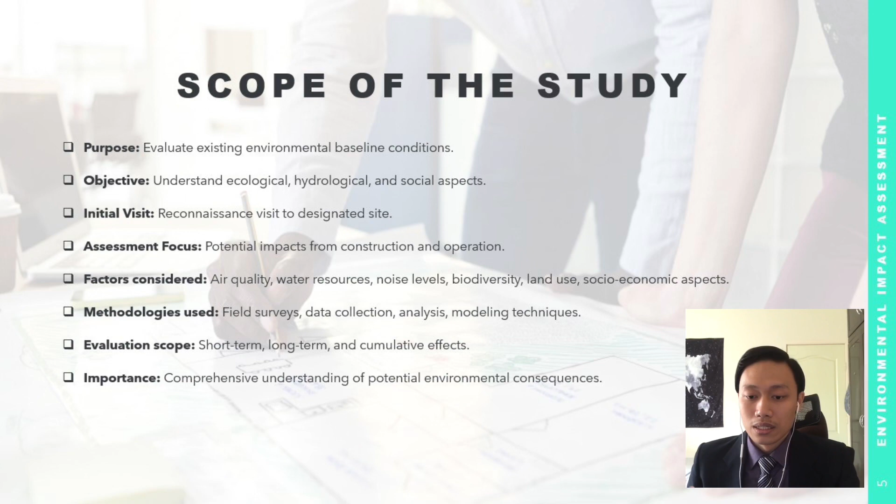The last one is evaluation scope and importance. EIA evaluates short-term, long-term, and cumulative effects of proposed projects on the environment. It provides a comprehensive understanding of potential environmental consequences, aiding in informed decision making and sustainable development practice.

So our objective has 5 points. The first one is description of the proposed project and activities involved. We need to provide a clear understanding of the project scope and execution.

Second is identification of influence, community and surroundings. We need to determine areas likely to be impacted by the proposed developments.

The third objective is assessment of environmental and social consequences. We need to anticipate, assess and evaluate impacts during construction and operation. Also, we need to consider the sensitive areas and potential risks.

The fourth one is the mitigation measures for adverse impacts. We need to identify measures to minimize pollution, disruption, and disturbance. Also address potential environmental and social concerns.

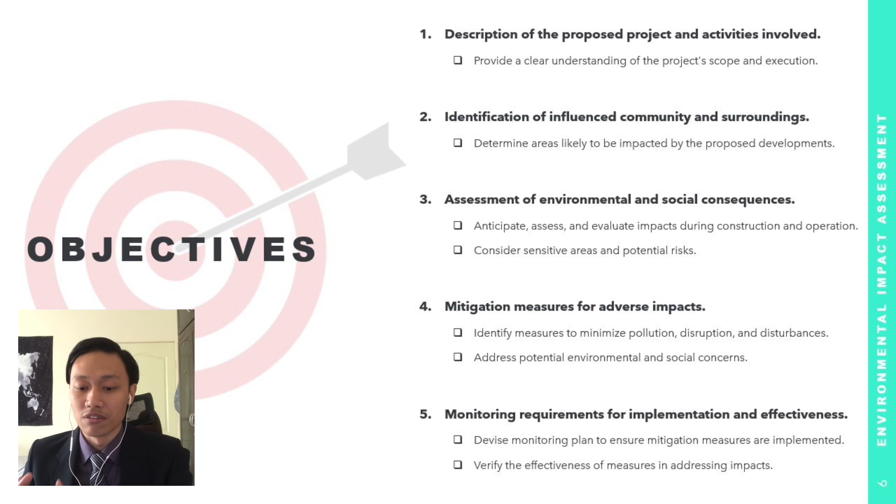The last one is monitoring requirements for implementation and effectiveness. We need to devise a monitoring plan to ensure mitigation measures are implemented. Also verify the effectiveness of measures in addressing impacts.

The next slide is project details. The project title is the construction and completion of Sekolah Kebangsaan Muzaffar Shah, which will include 24 classrooms and related facilities. This project will be located in Melaka Tengah, Melaka, especially at Lot PT 18341 in Bukit Katil District. The proposed site is a 10.9 acre area characterized by uneven and hilly terrain, currently covered with rubber trees and forest vegetation.

The site location and proximity: the proposed site for the school is situated near Water City Hotel on the western side of the hotel. This location provides convenient access for students and staff.

The next one is earthwork and platform level. Significant earthwork will be required to prepare the site for construction. The uneven and hilly terrain necessitates leveling to create a suitable platform for the school building. Next is infrastructure development.

Infrastructure development is a crucial aspect of the project. It includes the construction of internal roads, provision of power supply, water supply, sewer, and stormwater pipe network, and also a waste management system. The next one is the construction phase, where the project will be divided into 3 construction phases based on house design and type. This phased approach allows for efficient planning and execution while ensuring timely completion.

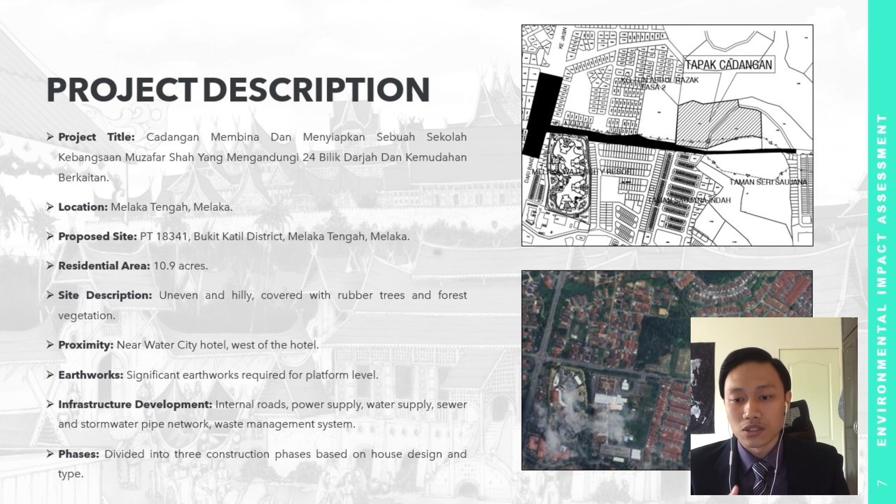So the conclusion is the construction of Sekolah Kebangsaan Muzaffar Shah in Melaka Tengah, Melaka is a significant project aimed at providing quality education facilities. The proposed site, which is uneven and hilly terrain, will require significant earthworks to create a suitable platform for the school. The infrastructure development, including internal roads, power supply, water supply, sewer and stormwater pipe network, and also waste management systems will be implemented. The project will be executed in 3 construction phases based on house design and type. This is the project layout for Sekolah Kebangsaan Muzaffar Shah at Melaka.

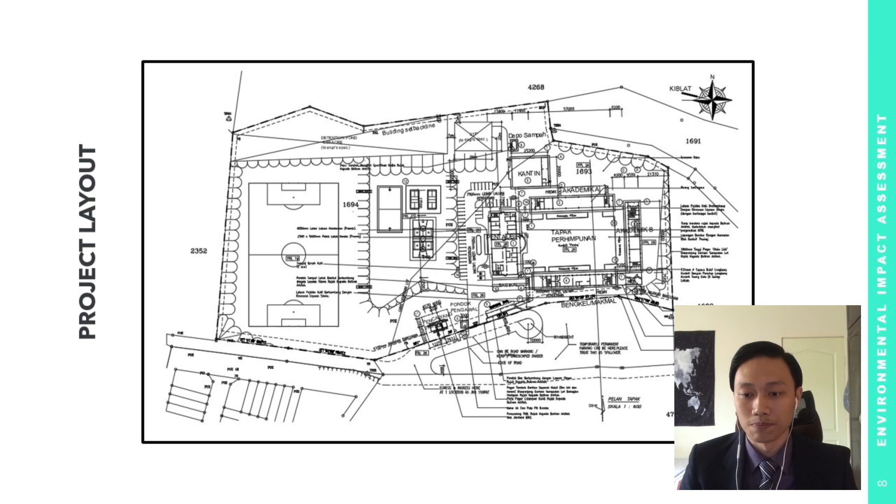Topography for this project, which is at Melaka Tengah, generally has a geography of flat terrain with some slight undulation in specific spots. The district is mostly located on the coastal plain of the Malacca Strait, which is distinguished by low-lying topography around sea level. The topography progressively rises as you approach further inland, resulting in somewhat higher altitudes and moderate slopes.

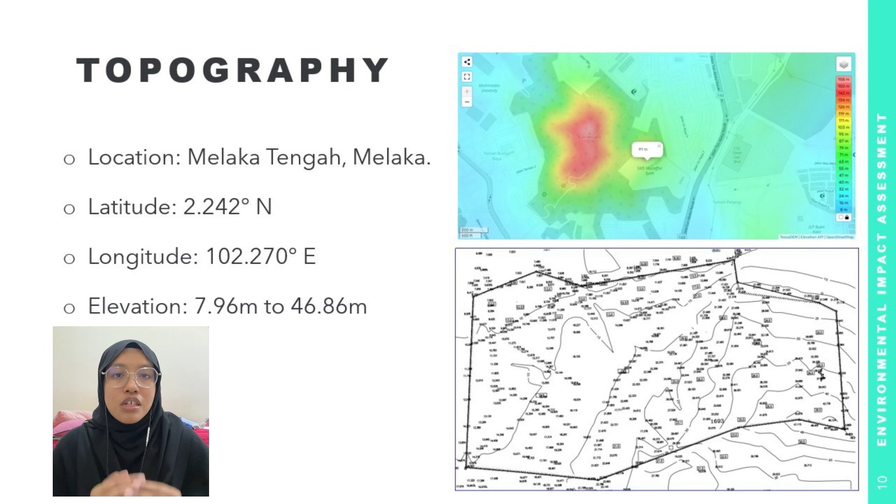Soil investigation was carried out to determine the subsurface condition and to get soil parameters for geotechnical design. Laboratory studies on soil samples acquired during field soil research activities were used to assess soil parameters. Based on the findings of the site investigations conducted by Ikram Engineering Services Sdn Berhad, 5 exploratory boreholes have been drilled within the project site.

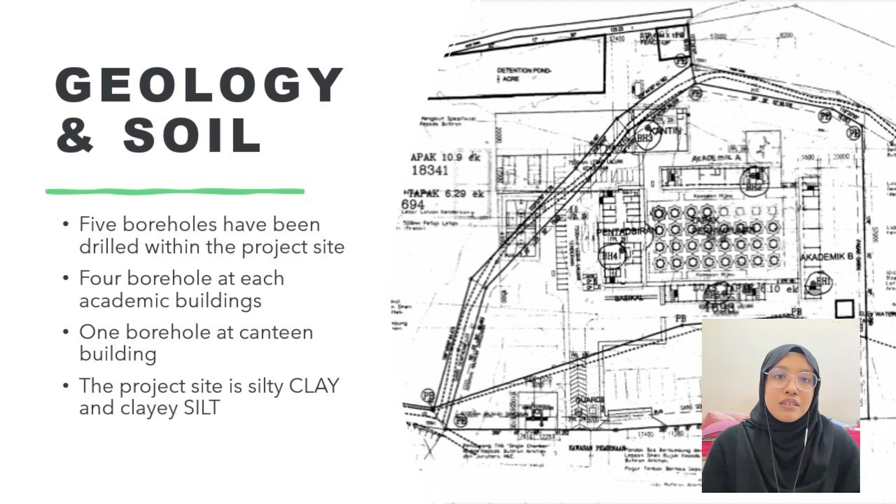Based on the figures shown, the Melaka River runs through the area, splitting Bandaraya Melaka into 2 halves. This river distinguishes the topography by generating a natural stream and altering the urban environment. In addition to the Melaka River, the state is traversed by other smaller rivers, streams, and creeks, including Sungai Kesang, Sungai Keruh, and Sungai Duyung. These bodies of water contribute to the region's surface hydrology by acting as drainage routes and sustaining ecosystems.

There are multiple mukims that include different areas of the Melaka River Basin. Bandar Hilir, Tanjung Kling, Batu Berendam, Bukit Baru, and Bertam are among the mukims along the Melaka River Basin. Each mukim may have unique features such as land usage, economic activity, and population density.

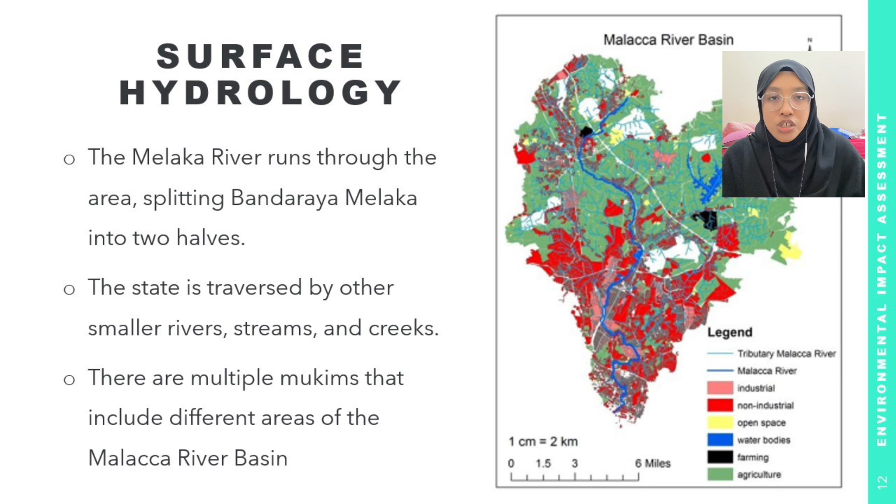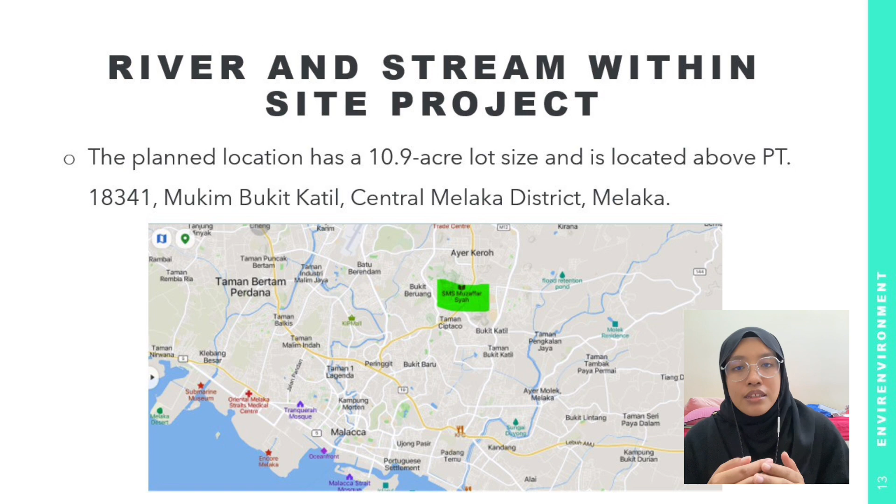The planned location has a 10.9 acre lot size and is located above PT 18341, Mukim Bukit Katil, Central Melaka District, Melaka. Rubber plants and other forest species are overgrown on this uneven mountainous construction site. To achieve the necessary platform level, significant ground cutting must be done. A road that connects Tehel with the Bukit Katil neighborhood is being built just in front of the building site.

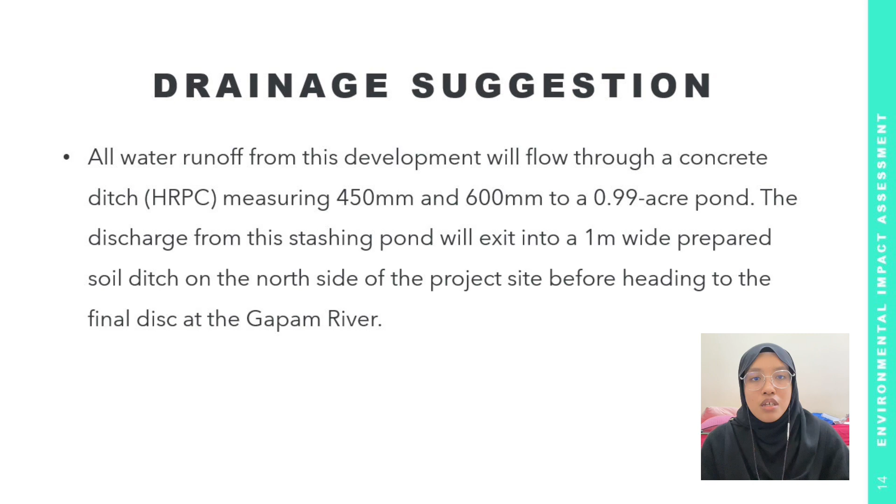For drainage suggestion, all water runoff from this development will flow through a concrete ditch, HRPC, measuring 450 mm and 600 mm, to a 0.99 acre pond. The discharge from the stashing pond will exit into a 1 meter wide prepared soil ditch on the north side of the project site before heading to the final ditch at the Gapam River.

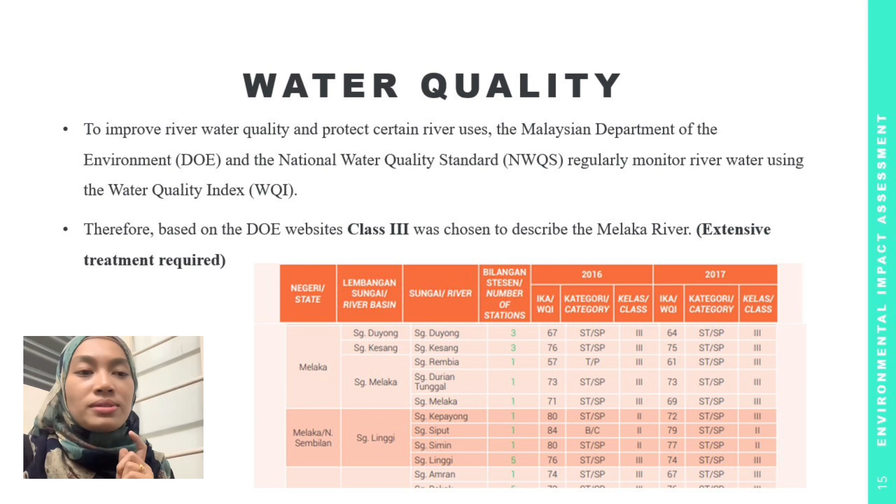Alright, so for the water quality, it is important to improve river water quality and protect certain river uses. The Malaysian Department of the Environment (DOE) and the National Water Quality Standard (NWQS) regularly monitor river water using the Water Quality Index, which is WQI. Therefore, based on the DOE website, Class 3 was chosen to describe the Melaka River and the extensive treatment required for this river. As you can see here, there is a table that allocates the Sungai Melaka as stated in Class 3.

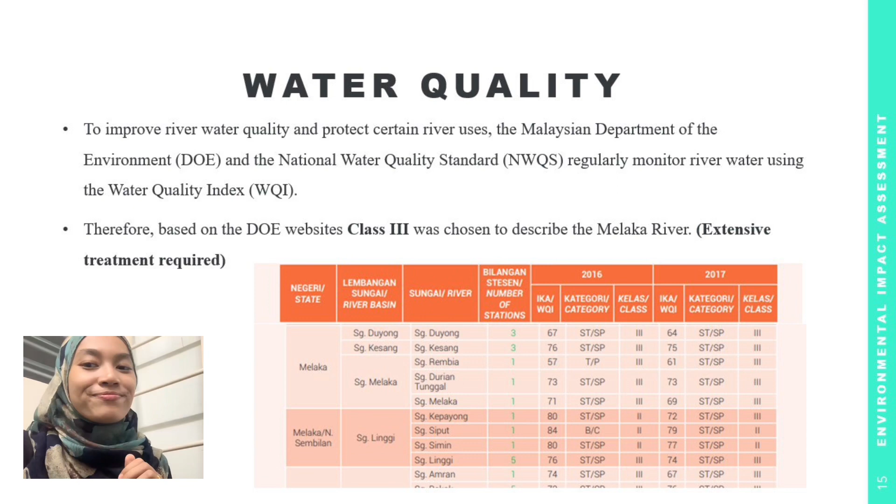Okay, so we will continue to the climate and meteorology. In this part, we are going to describe the weather for a specific area and time, including temperature, precipitation, relative humidity, wind speed, and direction, as provided by Jabatan Meteorologi Malaysia.

So, for the temperature at Melaka City, May was the warmest month ever recorded, which correlated with the dry season at the time. May's average temperature is 27.3 degrees Celsius.

The coldest month of the year is January, with an average temperature of 26.0 degrees Celsius.

For rainfall at Malacca city, the monthly rainfall at the Malacca station ranges from 83 mm to 276 mm between January and December. February typically had the lowest monthly rainfall at 83 mm, indicating the dry season, while November is Malacca's wettest month with an average rainfall of 276 mm.

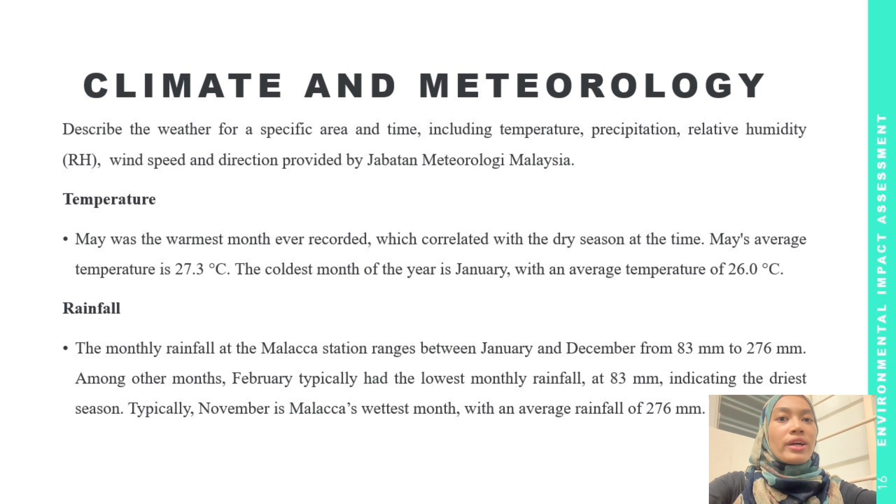For relative humidity, the annual average is high, with monthly mean values ranging from 76.91% to 84.60%. November has the highest relative humidity at 84.60%, while February, at 76.91%, has the lowest relative humidity of any month.

At Malacca City, November has the most days with rain, at 26.37 days, and February has the least number of rainy days, at 13.4 days.

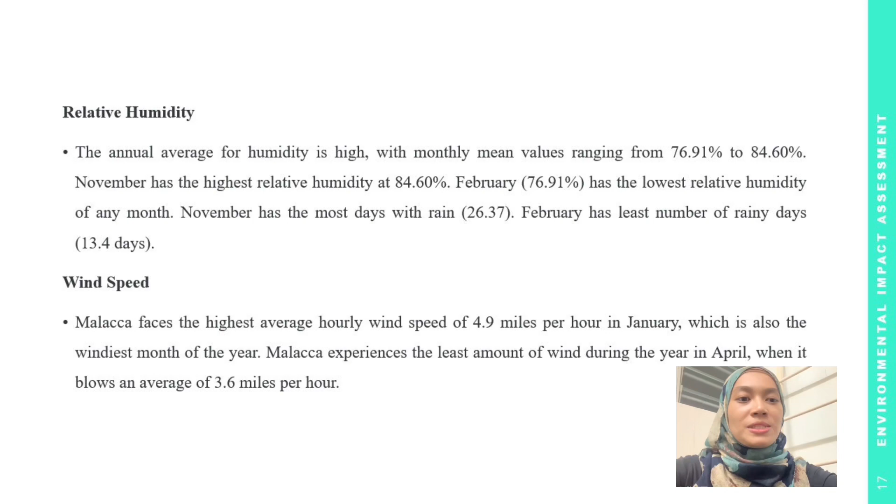For wind speed, Malacca faces the highest average hourly wind speed of 4.9 miles per hour in January, which is also the windiest month of the year. Malacca experiences the least wind during the year in April, where it blows an average of 3.6 miles per hour.

For land use within a 2.5 km radius of the project site, the nearest land use identification includes residential, educational, recreational, public services, place of worship, and healthcare. For educational facilities we have Multimedia University, and Pantai Hospital and ICRO for healthcare, along with many residential places in this area.

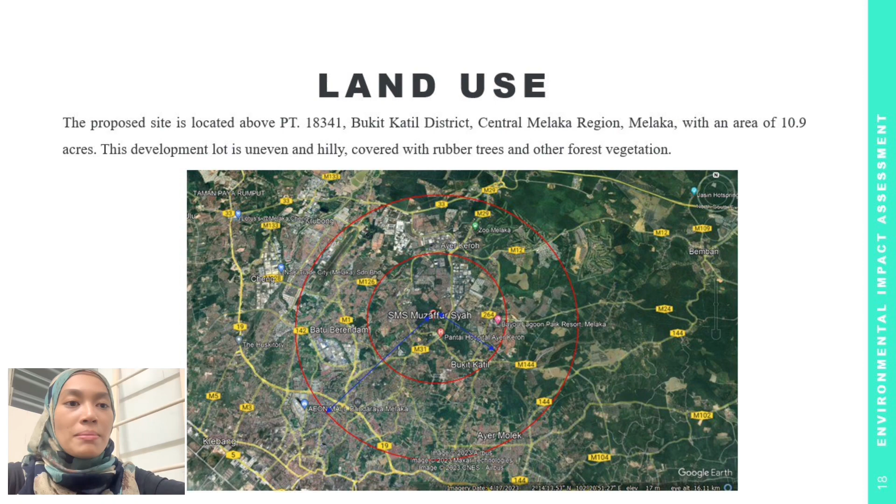In this area we also have places of worship, such as Masjid Ubudiyah and Sri Mutu Mariam Temple for Indians, and we also have public services for the residents.

For land use within a 5 km radius of the project site, the nearest land use identification includes residential, educational, recreational, public services, place of worship, and healthcare. The most nearby facilities located within this 5 km radius are listed below.

As you can see, there are 5 or 6 educational facilities, and we also have places of worship and many residential areas. We also have public services for that particular area, along with recreational purposes and commercial facilities.

For water quality, it is important to improve river water quality and protect certain river uses. The Department of Environment (DOE) and the National Water Quality Standard (NWQS) regularly monitor river water using the Water Quality Index (WQI).

Based on the DOE website, Class 3 was chosen to describe the Malacca River and the extensive treatment required for this river. As shown in the table, Sungai Malacca is classified under Class 3.

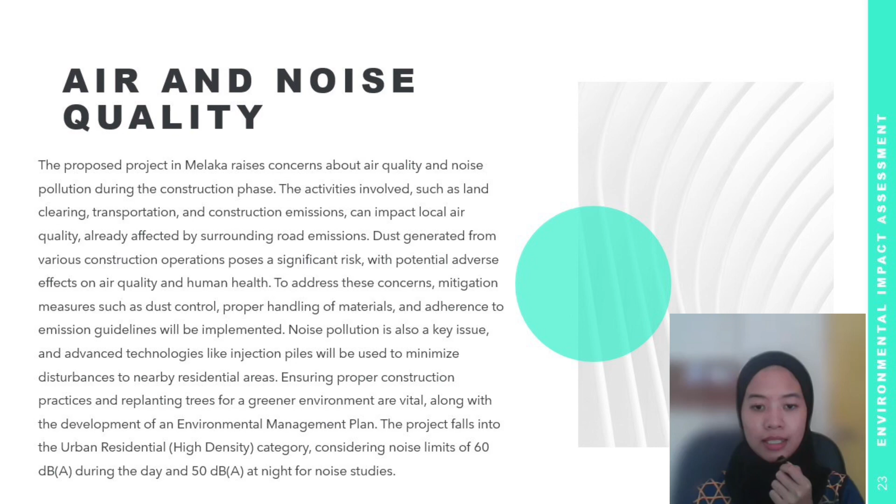Socioeconomy. The development of schools has significant socioeconomic impacts on communities. Firstly, it provides improved access to quality education, empowering individuals with knowledge and skills for personal growth and economic advancement. Investing in school development enhances human capital, leading to a more educated workforce that drives economic growth.

Secondly, schools promote social equality by providing equal access to education, breaking the cycle of poverty, and fostering social cohesion. School creates a sense of community and helps individuals from diverse backgrounds develop essential social skills.

Lastly, well-developed schools stimulate the local economy by creating employment opportunities and attracting investment in related industries. This leads to increased economic transactions, revenue generation, and overall community development. Overall, school development plays a crucial role in creating a prosperous and inclusive society.

Infrastructure and utilities. This section of the report provides an overview and evaluation of the infrastructure and utilities in the project area. It covers elements such as roads, networks, electricity supply, water system, communication service, and sanitation facilities. The assessment examines the current state and functionality of these components to ensure efficient operation and connectivity. It identifies areas of strengths, weaknesses, and potential improvements.

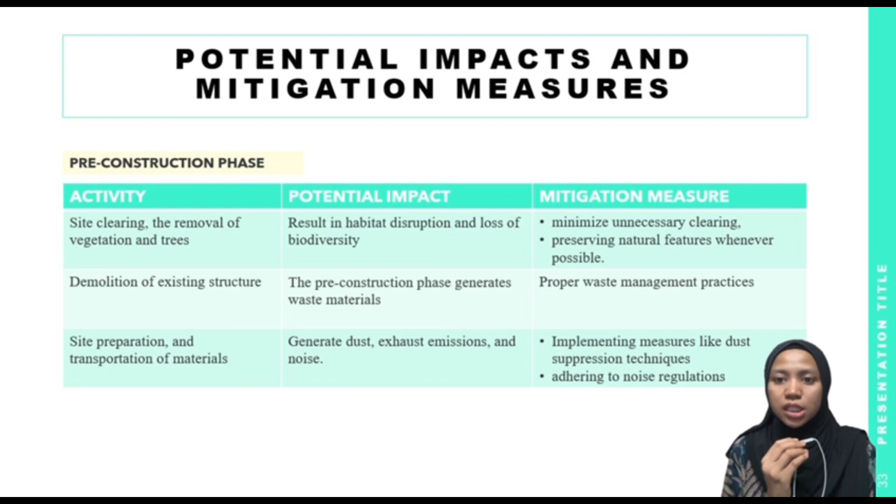The last one is site preparation and transportation of materials. These activities generate dust, exhaust emission, and noise. These pollutants can affect air quality and cause disturbance to surrounding communities and wildlife. To mitigate this is by implementing measures like dust suppression technique, using low emission machineries, and adhering to noise regulation can help minimize this impact.

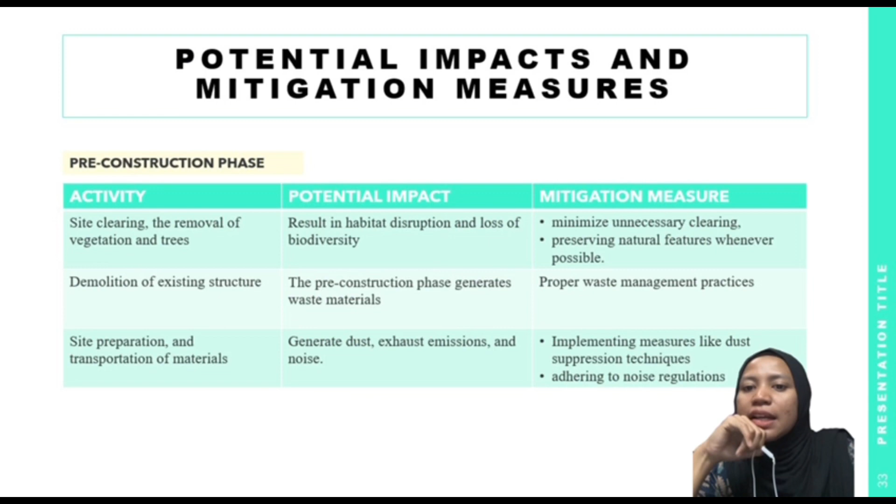During construction phase, excavation, earthwork, and grading works can disturb the topsoil and increase the risk of soil erosion. This can lead to sediment runoff into nearby water bodies and potentially impact water quality and aquatic ecosystems.

There are a few mitigation measures that can be taken, which are: install sediment barriers, silt fences, or sediment ponds around the excavation area to prevent soil erosion and capture sediment. Next, implement erosion control measures such as hydroseeding or mulching to stabilize exposed soil. The last one is implement stormwater management practice such as sediment basins or sediment traps to capture and treat runoff before it enters water bodies.

These activities can also remove and disrupt habitats, including forests, wetlands, or grasslands, which can disrupt wildlife populations and their natural habitats. So the mitigation measure is to identify and protect important habitats or environmentally sensitive areas before and during excavation. Next, establish buffer zones or exclusion areas around habitats to prevent disturbance. The third one is to develop a habitat restoration plan to restore or create new habitats in the project area once excavation is complete.

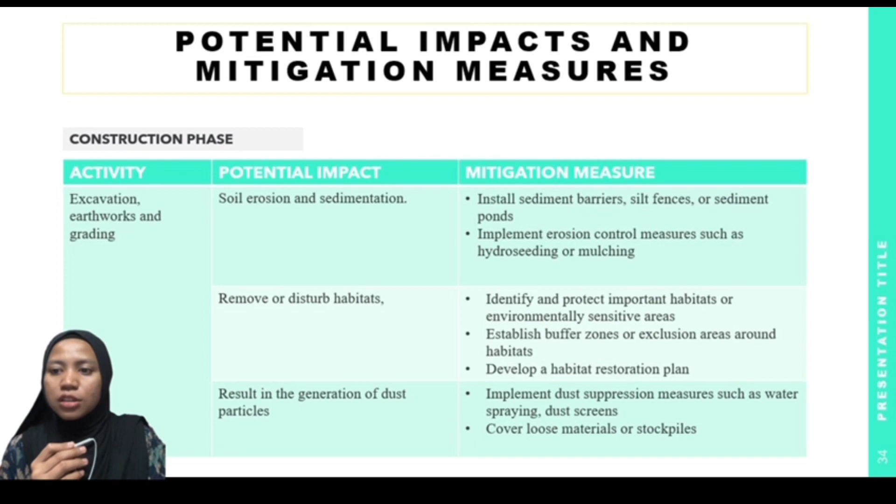Earthwork and grading involve moving soil, which can result in the generation of dust particles. These particles can become suspended in the air and contribute to air pollution. To reduce this, implement dust suppression measures such as water spray, dust screen, or dust suppression agents to minimize airborne dust. Second, cover loose materials or stockpiles to prevent wind erosion and dust generation. Lastly, use equipment with dust control features such as water spray or dust collection systems where feasible.

Another activity during the construction phase is concrete pouring. The process of mixing and pouring concrete can generate dust particles, especially if dry materials or improper mixing techniques are used. These particles can become airborne and contribute to air pollution. This impact can be reduced by using eco-friendly or low-emission concrete mixture whenever feasible.

Control and minimize the release of dust and particulate matter during concrete mixing and pouring. Lastly, properly cover and contain concrete trucks to prevent spillage and reduce airborne particles.

Next is construction vehicles and equipment operations. Construction vehicles and equipment such as bulldozers, excavators, and trucks typically run on diesel or gasoline engines that emit pollutants like nitrogen oxide, particulate matter, and carbon monoxide. These machineries also generate high levels of noise during operation, which can disturb the comfort of people around.

This can be reduced by using low emission or electric powered equipment. Next is implement noise reduction measures such as mufflers or enclosures.

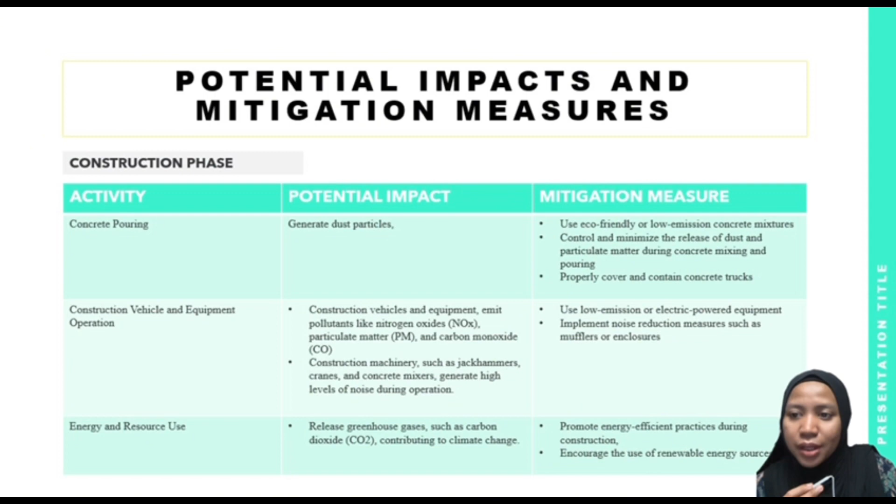In post-construction phase, facility operations and maintenance include regular inspections, repairs, cleaning, and overall management of the building and its systems. These activities give a few potential impacts: inefficient energy usage can lead to increased greenhouse gas emissions and contribute to climate change. The mitigation measure is to implement an energy management system, conduct regular energy audits, and promote energy efficient practice among occupants. For example, upgrading lighting systems to LED, optimizing HVAC systems, and installing energy saving appliances.

Next impact is excessive water usage can strain local water resources and impact ecosystems. So the mitigation measure is to implement a water reuse system such as rainwater harvesting for irrigation.

Next, improper waste management can result in increased landfill usage and contribute to pollution. So to reduce this, establish recycling and waste separation programs. We can also educate occupants on proper waste sorting and disposal practice.

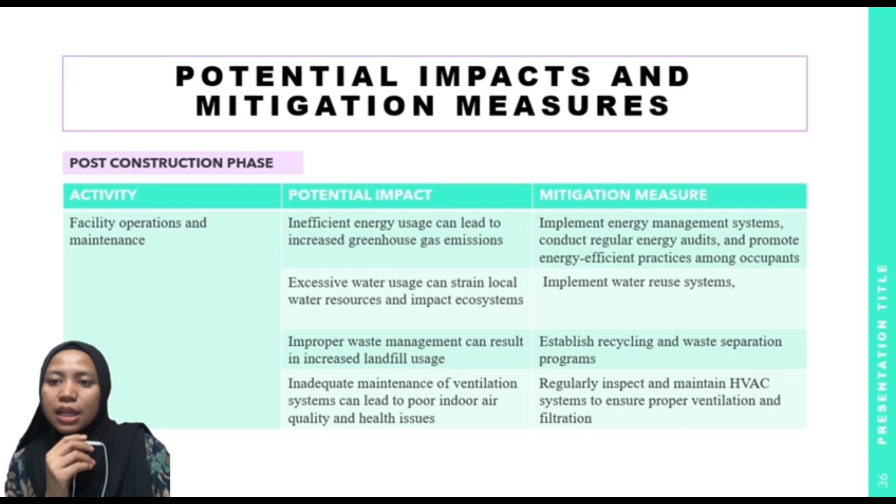In conclusion, the environmental impact assessment has been created for this school construction project as a safeguard for the environment. To lessen pollution around the building site, this research is being conducted.

Appropriate mitigation measures are decided upon after a comprehensive assessment of the possible harm that may occur prior to, during, and after construction. This mitigating action is used to restrict or lessen environmental problems since a residential area is close by.

According to the EIA report and guidelines, the research found that if all of the mitigation procedures described in this section are implemented and incorporated into the overall design and execution of the residential project, the significant effect will be reduced.

Furthermore, mitigating measures and constant monitoring throughout the installation of the residential development area must be implemented. As a result, it is advised that developers implement mitigating measures such as creating an environmental monitoring program, or EMP, meaning an environmental monitoring program.

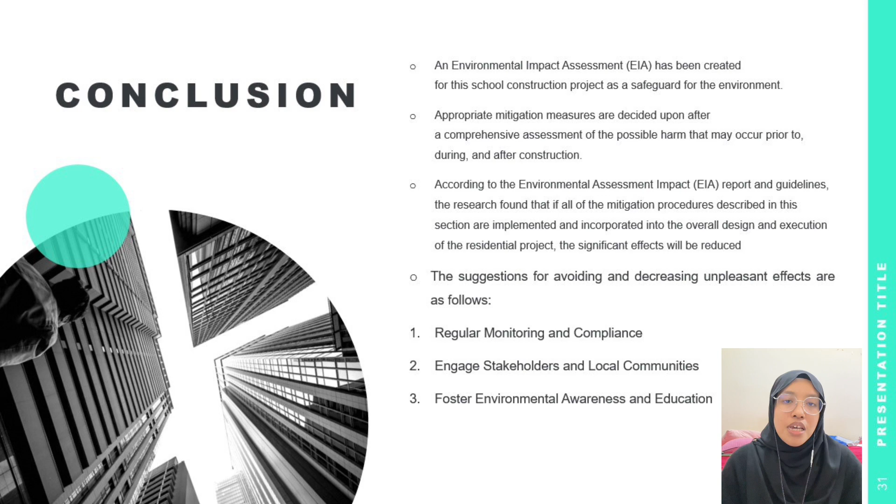By adopting these guidelines, the project may move forward while reducing negative environmental consequences and guaranteeing the ecosystem's long-term survival. Continuous monitoring, compliance and adaptive management will be required to meet any unexpected issues and make appropriate modifications to properly safeguard the environment.